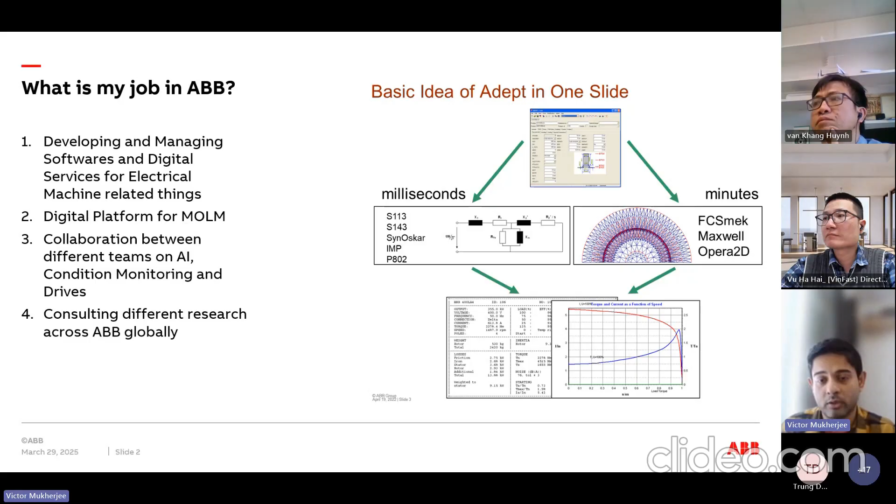So Adept is kind of like an umbrella under which we have our in-house software and also commercial software. It is a bigger umbrella, because if you think about a big company like ABB, we have a very big portfolio. So it has to be very organized how things are done and so on.

One very important idea, whenever you think about any big organization or complex system, when you have multiple researchers, multiple people working in different fields, different divisions, different geographical locations, is how do you collaborate? And I think the modern way of collaboration is basically microservices. For example, let's say person A develops some model and person B wants to use that model. It is very bad if person A needs to zip a file and send it to person B, because then the software is never updated and so on.

But the idea is that everybody can be the owner of their own services and they can host them in the cloud, for example. And anybody who needs them can just call those APIs. I don't know how many of you are familiar with the word API. I think the abbreviation is something like application programming interface, but mainly it's basically a URL link with some sort of token, let's say a JSON file that you give to get and receive information.

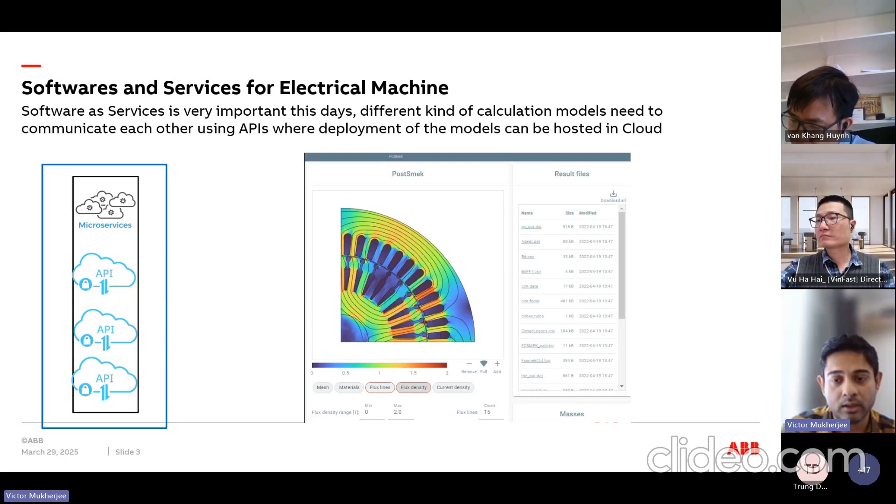For example, this picture that you are seeing is basically in a web page, this kind of flux density plot. So not in any software, but through an HTML page we can do that kind of thing. Everything can happen in the browser. You do not need any desktop GUI software in the modern day. I think there are a few commercial software packages now trying to give you similar experiences, but I would say that we are very advanced in that part: nothing is on the desktop, everything is on the cloud.

Then one of my very first works when I came as a fresh PhD student to ABB was this: how we do system level simulations with drives. I think many of you know that in modern day, whenever we talk about system efficiency, it is not only about individual components. I think we have a VinFast speaker after me, and he can maybe speak more on that.

If you think, for example, about an electric car, every component's efficiency matters and adds up in the end. But how do you model that kind of system level efficiency or system level behavior? For example, when a drive is connected to a machine, a lot of things happen which do not happen when you connect it direct online. For example, a drive has a very ugly voltage waveform. It can create vibrations, it can create noise.

So how do you model them? If you just model it with a sinusoidal supply, then that's very bad. If you model it even with a PWM supply, it is still not very realistic. The ideal situation is that your drive software should directly communicate with your finite element software. It should give you the voltage waveform, and the current that you are solving in your finite element solver should get back to the control mechanism of your drive software.

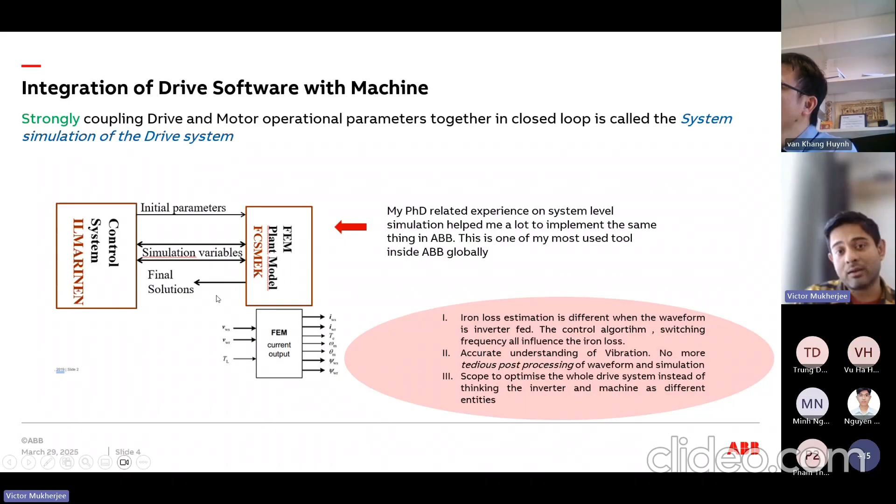But sometimes making this kind of strong software coupling can be very challenging. For some other drives, we do not have that. It was very challenging for us to do that. In those scenarios, we do what we call weak coupling, where we solve the voltage waveform using an analytical model. We store the voltage waveform, and then, like an open loop, we solve the finite element.

And I think in most cases in commercial software, the majority of people are doing it like that. When it is very complex to make a strong coupling, they do this kind of weak coupling: they store the voltage waveform using an analytical model from, for example, MATLAB Simulink, and then give that waveform to more of an open loop model.

This kind of work requires a very strong collaboration and cooperation, because, for example, I am not the person who makes the drive software. I'm not the person who makes the finite element software. But I have to keep asking people and develop that kind of an interface. That requires a lot of collaboration and cooperation. That is very important.

In the academic world, you are quite tied to very easy software, let's say MATLAB, which is very easy to learn and good for researchers. But whenever we work in industry, it is never or very seldom with MATLAB, because it cannot be easily distributed, and it is expensive also. Normally C++ is a great tool when we do a lot of this kind of software development. For any cloud-related or web-related development like APIs and microservices, we always use the Go language, which is a programming language developed by Google.

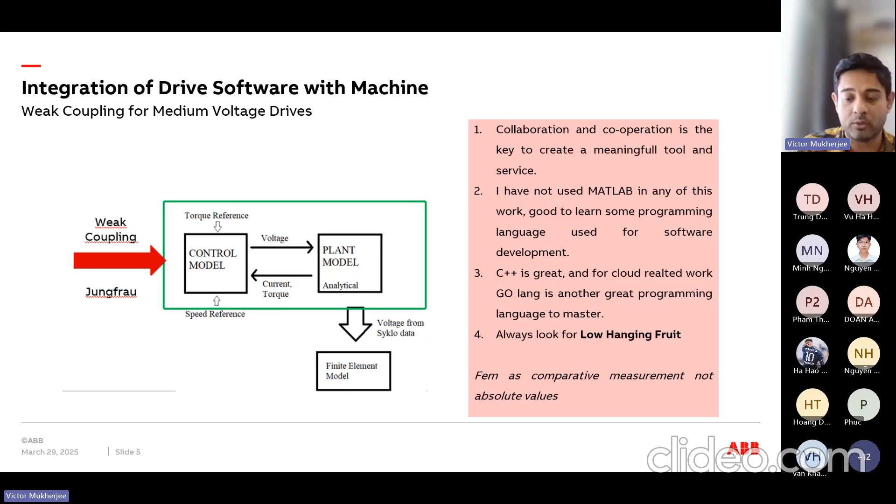And then one very important thing to remember is this: whenever you think about finite element software, it is more of a comparative measurement and not absolute values. So that is another thing to remember, very important. Do not think that, okay, if it is 20 kilowatt, you need to match 20 kilowatt. Nothing like that. It is always how much better the design is in a comparative scenario. That's how you use finite element.

Then, for example, as I said, our main software is Adept, but we also collaborate with third-party software. And in a company like ABB, which is a very big organization, it is impossible to make individually a Maxwell model of our thousands of machines. So we needed some sort of an interface so that we can integrate Ansys Maxwell with Adept, so that people can open our software Adept, which has all the machine information, click one button, and then automatically this whole Maxwell model is developed from our database.

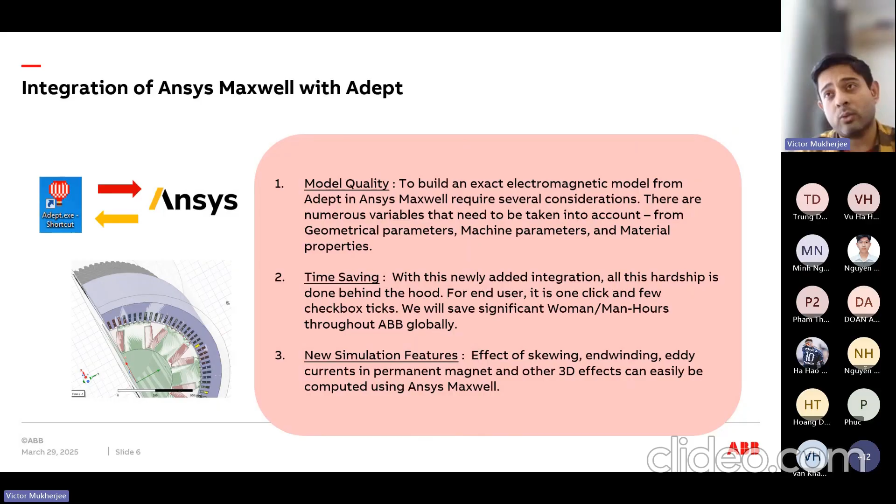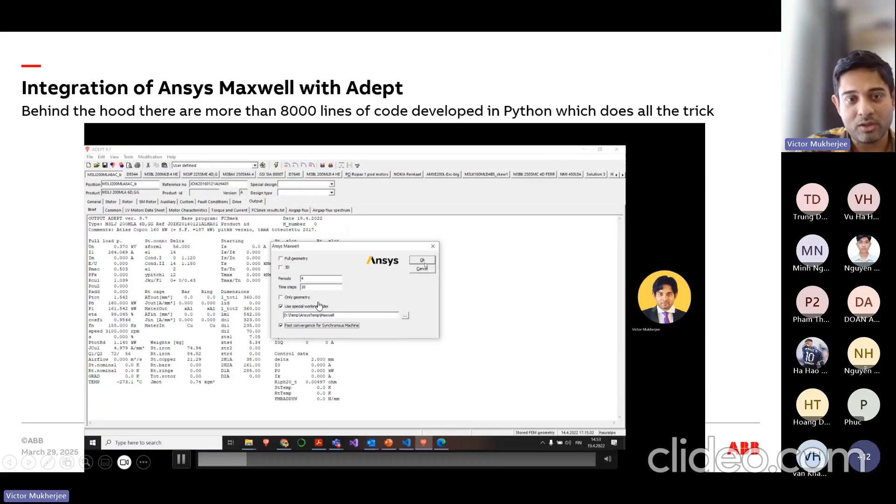So that kind of required a collaboration. So we collaborated with Ansys. We had a 2 or 3 year project with them, and then we developed something. So I can very quickly show you a video maybe. So it's written on the top. Behind the hood, there are more than 8,000 lines of code developed in Python, which does all the trick. But here you just decide what machines you want. You just click some buttons and pretty much that's it.

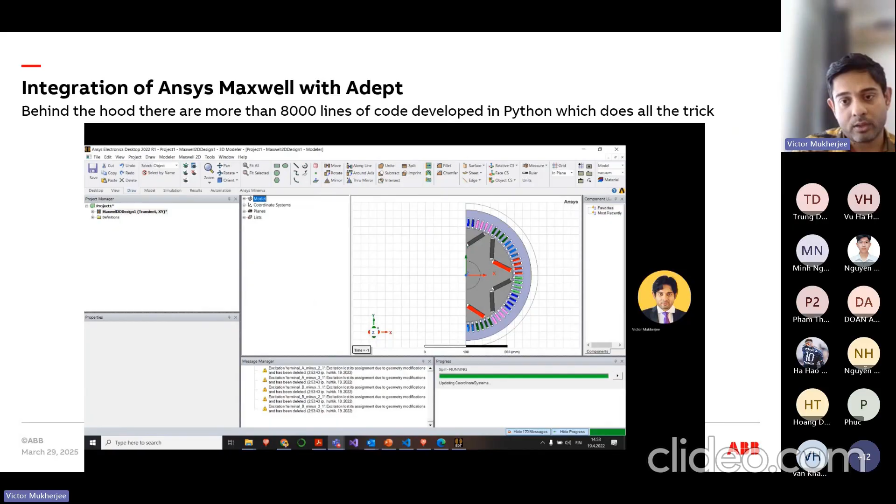So then Maxwell will automatically open and it will collect all the information. This is geometrical information, operational information that you have in your machine. It will collect that information and then it will just develop the model for you. So this kind of integration we have done with Maxwell. And I think we are one of the biggest users of Maxwell software, along with our in-house software. But as you see here, when the user clicks that one button, all the model development is done exactly like how it is done.

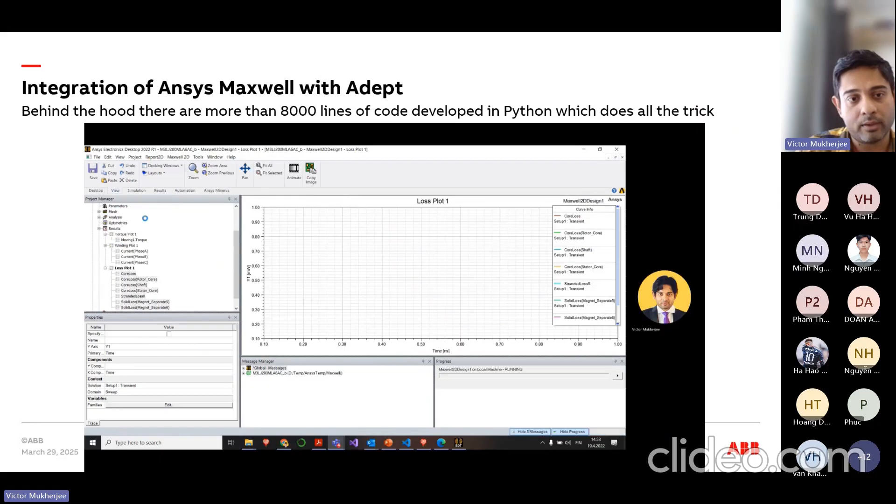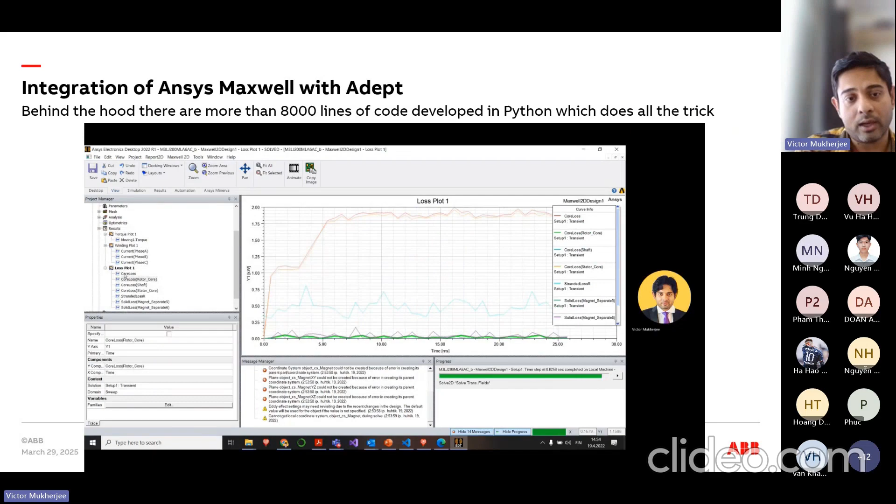And the benefit of this is that a lot of our geometries are very much ABB specific. So it is not possible to have those in Maxwell. They do not have those kinds of templates or anything. But here the idea is that whenever the user clicks it, they get all the necessary information. Let's say torque, current, loss, flux densities, and those kinds of plots, and so on and so forth.

So it is very important to know how we can make things faster, because you can save time for model development. If somebody needs to develop a model like this by themselves, it can take them, let's say, a couple of hours. But now with this kind of interface integration, in 10 seconds they can develop a model. So if you think about ABB, which has so many engineers and so many machines we need to develop, it saves a huge amount of work time. And that is very, very important, how you save time for your development.

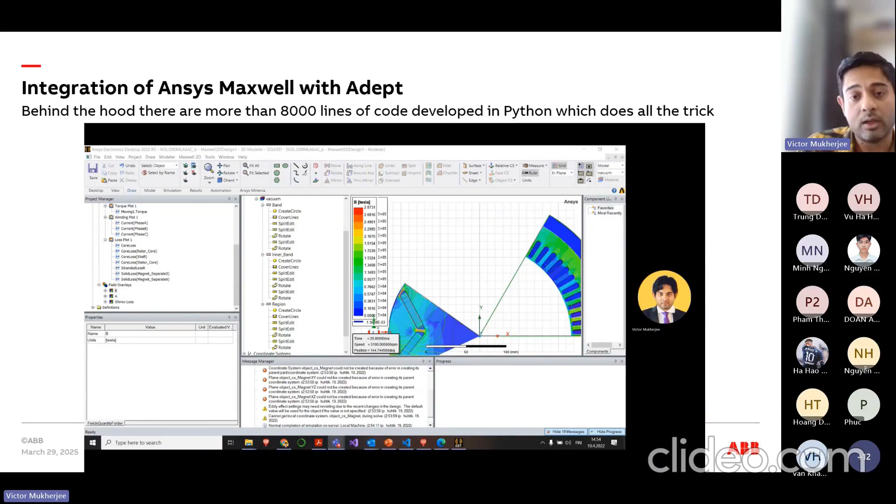Okay, and now with Maxwell, we have done some interesting work: we did a thorough analysis of how 2D versus 3D simulations compare. I know that a lot of people in the academic world have a huge fascination with 3D simulations, and rightly so, because a lot of electrical machine phenomena are 3D. So it is good to know that information in 3D and verify how close our 2D approximations are. So we did a humongous amount of comparison of 2D and 3D simulations.

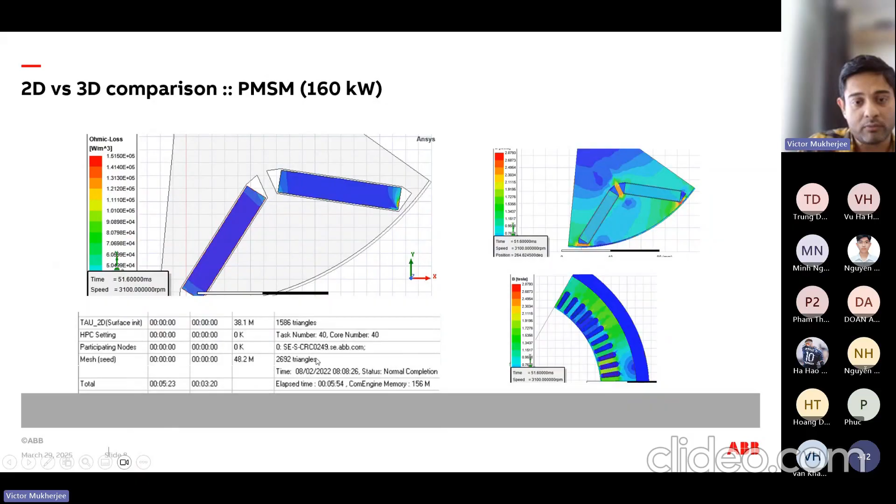We have our own internal servers where we have a huge amount of computational resources, and we did them there. So we made a 2D model and then a 3D model, and our goal was to see how much accuracy we are getting and how much computational time we have to lose. So you can see that with a 2D model, we can simulate something within 5 minutes with this kind of mesh. And then the same thing on our server, using 40 cores, took around 61 hours. So almost 2.5 days.

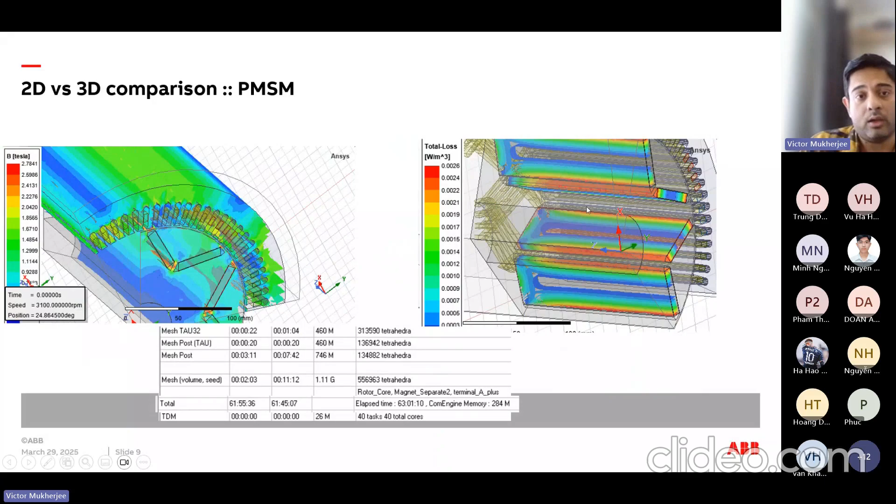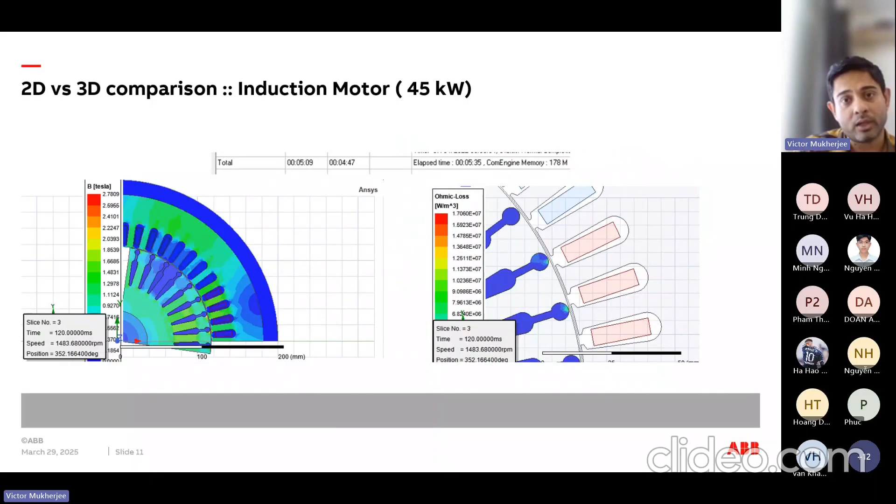And the idea was to check how this torque looks, for example, and then how other features look. Then we did similar analysis with induction machines, for example, the same thing, 2D and 3D. And for us it is very easy to do, as I said, because we have this kind of an interface, like I showed you previously. So we can just click one button that makes the 3D model.

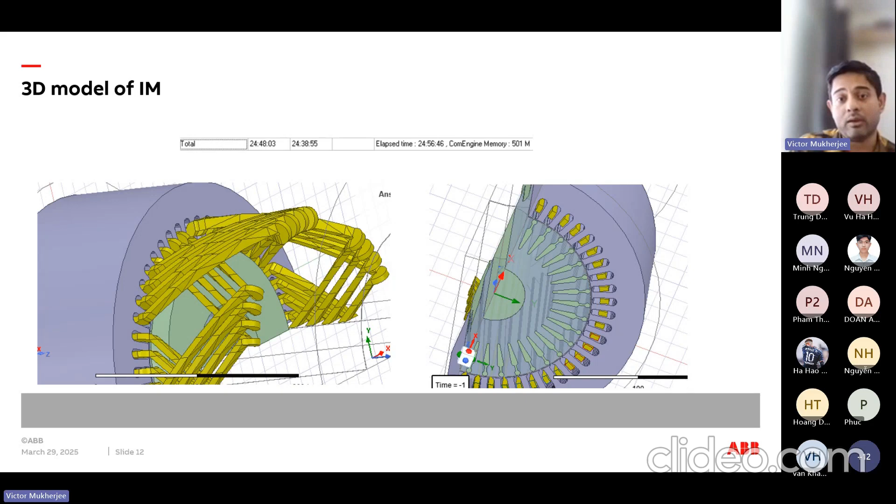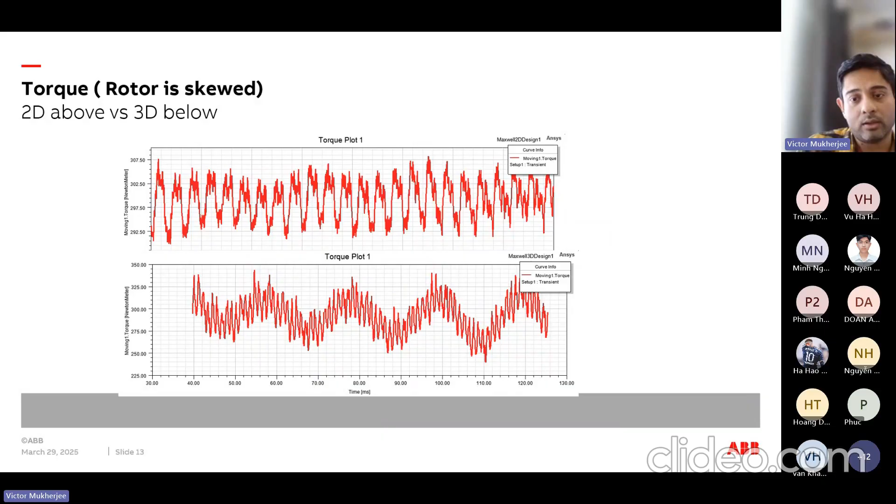So all these things, this model build-up, are happening automatically. And that is the benefit, that we can do this kind of analysis very easily, very fast, because all these model generations are very automatic. And then we compared the 2D and 3D rotor when it is skewed and so on. And you can clearly see that the 3D behavior is, of course, better than the 2D approximations, some torque waveform and so on.

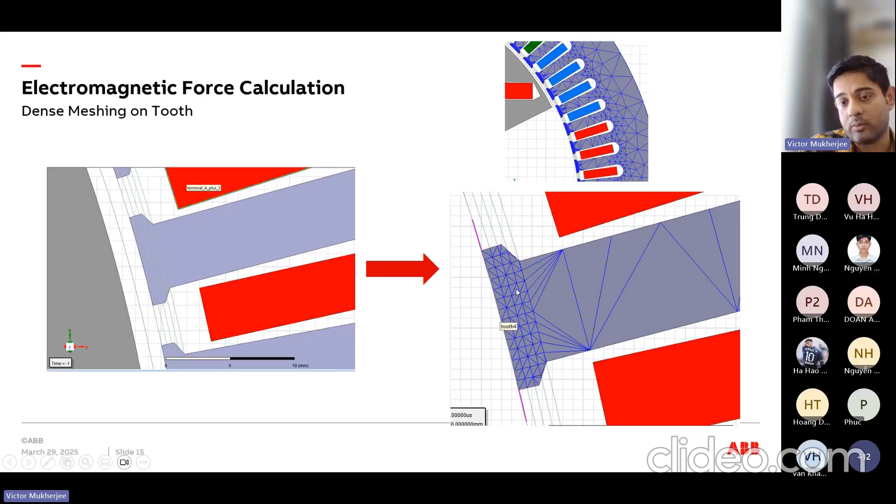Then when it comes to, for example, noise and vibration analysis, you know that it is important to know what the electromagnetic forces are. There are a lot of models, but one of them is that you compute the forces in this kind of region in the tooth and in the air gap. So this meshing and computation has also been automated, so that you just click one button to compute the forces, and then automatically four layers will be created and meshed. This kind of arc will be created and force computations will be done, and everything happens with one click.

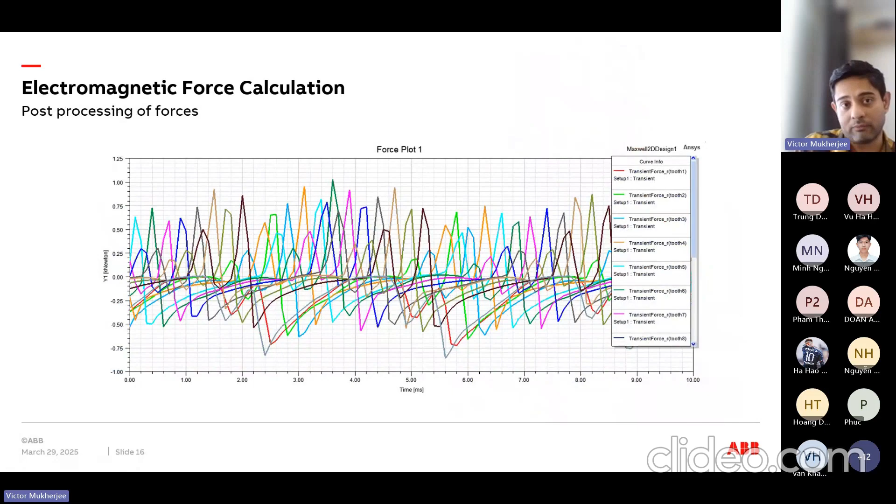So R&D engineers do not need to do those things by themselves every time. So we save a huge amount of time with this kind of software automation. Then, for example, we have magnet segmentation, how you segment the magnet so that you get less losses in the magnet. Probably most of you know that at 50 hertz perhaps it doesn't matter so much, but whenever you go to higher frequencies, eddy current is a concern.

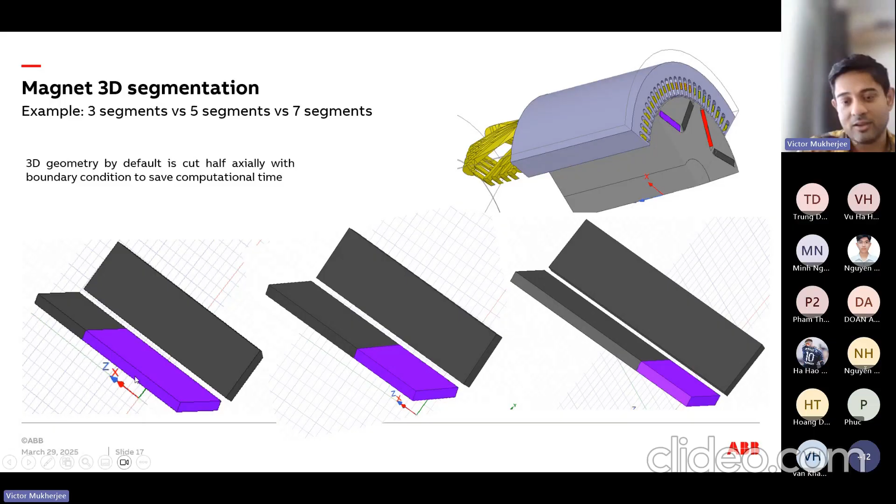So how do you model that kind of problem in 3D, because as you saw previously, it can take a huge amount of time. And in this case, you need a very dense mesh if you want to model the skin effect, isn't it? So how do you model that? This is not my invention. This is coming from our ANSYS Maxwell colleagues who have helped us do this kind of simulation and automate it. So now, with one click again, we can have this geometry created, a dense mesh will be created automatically, and we solve, for example, the skin effect.

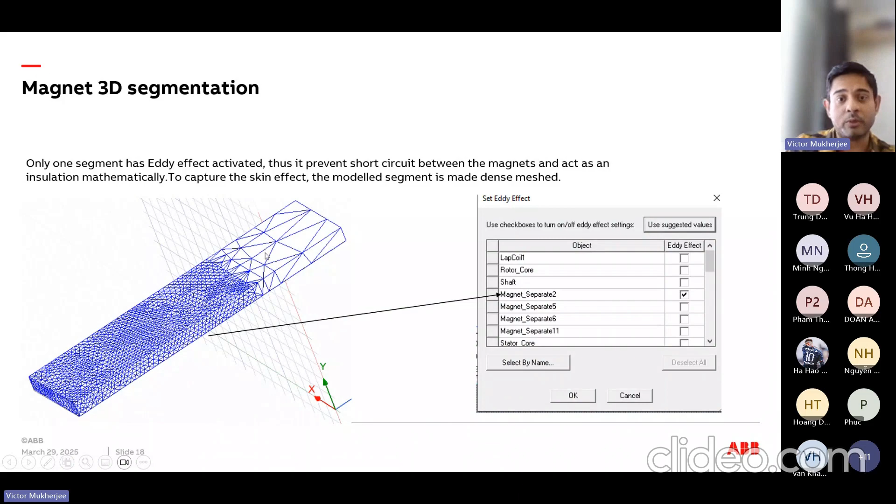And then we apply some boundary conditions here, which basically means that there is some insulation coming from the segmentation, and then we just multiply them. So that's what I have written: only one segment eddy effect activated, because it prevents short circuit between magnets and acts as an insulation mathematically. So if you give a boundary condition, the current is not flowing from one segment to another. So it's a very smart way to model 3D magnet segmentation with Maxwell. And then you can see some results here, how the losses are.

Okay, in the beginning I said that I am also very much collaborating with industrial AI. For the last 2 or 3 years, I have been quite active with a lot of industrial AI related projects, and that's how I also know Trung, I think. So we collaborate with different research institutions in Finland and with universities, and I think it's a win-win situation, because together we can create very nice value out of the work. This is one collaboration that we did with a Finnish research institute called VTT.

And the goal was this: when you think about induction machines, whenever one is connected to the grid, there is a huge transient, right? That's the whole starting behavior of an induction machine. It is quite a transient behavior. So we wanted to model that with an artificial neural network. And then we thought this can be used as a digital twin, for example, of induction machine behavior.

So here the complexity lies in how you can model a transient behavior in a time series. So how this is beneficial is that you need to take the input of the change of your rotor speed every 10 seconds. That's how we take it as back propagation, and then we model this using this kind of artificial neural network.

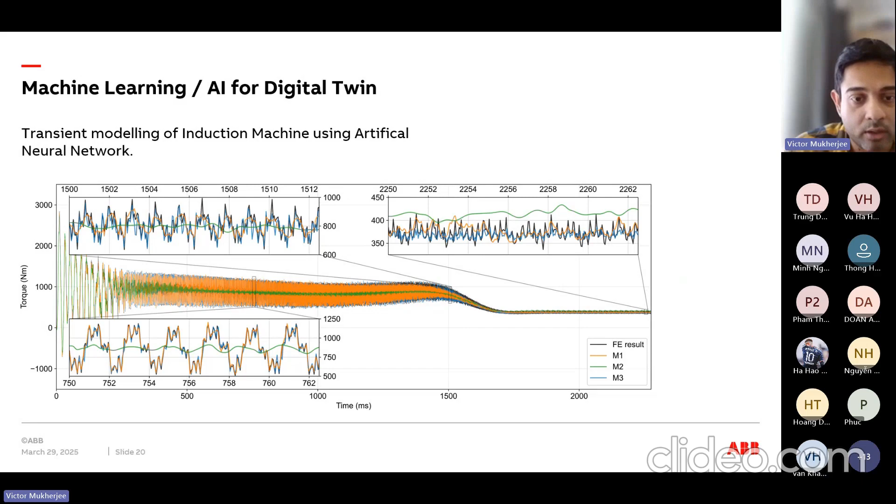Then also one of the important things that always comes to our desk is how you model the losses of an electrical machine using machine learning. Because if you think about electrical machines, there are, let's say, 3 key components that influence the losses. One is the speed of your machine, the torque of the machine, and the switching frequency of the drive at which you are operating your machine. So there are 3 components that mostly influence the losses.

And our goal was: can we create a machine learning, or let's say AI-based, digital twin of the electrical machine that can take those 3 inputs and quickly predict the losses accurately? And then we benchmarked different machine learning models. We used neural networks, light gradient boosting methods, and lookup table based methods. What we have observed is that the very simple lookup table based method is not good. Whenever you have more and more dimensions to interpolate, that's not good.

Then going to a too complex neural network is also not super good for us. But what we found is that these light gradient boosting regression models are very good, giving very good results. So this kind of quick model that can predict the losses can be very beneficial when in real time you need to model the temperature distribution of the machines and so on. And this is all public information. Papers have been written, so if you search in IEEE, you can find all this information in detail.

For example, you will hear this kind of news quite often, that AI has defeated a chess player, or AI has defeated another chess player in some games. Reinforcement learning is one branch of unsupervised machine learning. Sorry, let me go back. When we talk about machine learning in the loss modeling scenario, it is supervised learning, because you have a clear understanding of the operating points and the losses, all the data is there, and you are just modeling.

But reinforcement learning is unsupervised learning. The fundamental difference is that you do not tell the agent what the outputs are. You tell the agent what the behavior of the system is. For example, you play a chess game with the AI many times. If the AI makes a good decision, you give it a reward. If the AI makes a bad move towards the goal, you give it a penalty. So you basically let the AI play the electrical machine game millions of times and see if it can reach the final goal or not.

If you have, let's say, a base machine, let's say you took a machine from the vault, which is, let's say, 50 kilowatt, and then you give a task to the AI: hey, I have a basic design of a 50 kilowatt machine, now make me a 60 kilowatt machine for these conditions. And you make it play this kind of game more and more. And when it plays these games a million times, it knows exactly the policy. Please remember this word, policy.

It remembers the policy of the game: okay, if I play this way, I get a reward because I can achieve my target. If I play this way, I do not get a reward, I get a penalty, and I lose the game. So this is the idea of reinforcement learning, which we investigated with Aalto University, and we have now submitted a paper also. The idea is how we design a machine using reinforcement learning. For example, if this is the starting point of a machine, and this is the goal, how the algorithm can automatically make these decisions to get to this kind of final design.

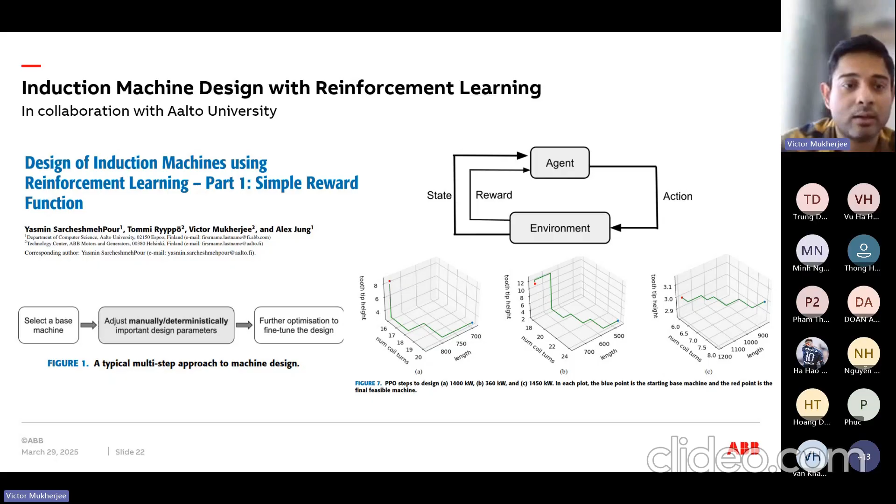Then we also work quite actively on bearing health analysis using machine learning. This is another collaboration that we do with Aalto University. As you know, around 50% of industrial machine faults come from bearing faults. And there can be many ways a bearing develops a fault. If the outer ring is destroyed, there can be one type of fault. If the inner ring is destroyed, there can be another kind of fault. And there are so many other ways the fault can develop.

So we took this kind of modeling, where we have done a huge amount of simulations, and then we wanted to see how the bearing fault can be modeled with machine learning. We have an electromechanical model for the bearing, which is basically a lumped parameter based bearing model. And when we collect the data in real life, we use this kind of smart sensor. You can Google ABB smart sensor. It's a device that can collect different kinds of data from the machine, for example flux, voltage, vibrations, temperature, and all those signals. And once it collects all this data, it can send it to the cloud.

And then the goal is that we can analyze this data with frequency and time domain analysis. Then we have our model that does AI based fault diagnosis based on this data crunching. The goal is to have a model to predict whether the machine is having some bearing problem or not. If there is some sort of bearing problem, we can see the signals in our cloud dashboard. Then we can already tell our service engineer, hey, maybe you need to visit this factory and tell the manager that the machine needs some inspections.

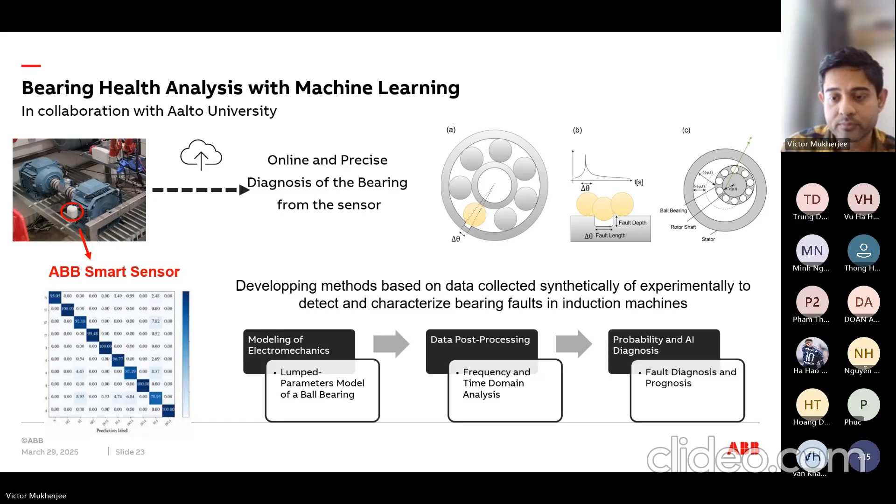Then another work that we are doing right now is anomaly detection of induction machines. Something very similar, but here the approach is a little bit different in that we wanted to use an autoencoder-based system. That basically means that we wanted to know what is the healthy data and what is the faulty data, and then we just wanted to segregate the healthy and the faulty data with these autoencoders.

But as you know, in any industrial AI work, the biggest challenge is to get the data. We cannot have faulty machine data in a measurement. So how do we solve this problem? We solve it by simulating those machines with the faulty conditions. But hey, there is another problem there. Your simulation world and your measurement world, they're different. So your simulated data will look very different than your measured data, right? So how do you solve this problem? That is exactly where data augmentation comes in.

When you know your measurement data and your simulated data, you can understand what the differences of the simulated data with the measured data are. Then you can augment the noises and the uncertainties that come in the measured data inside your simulated data, so that your simulated data becomes closer to reality. That is what we call data augmentation: you calculate the data from simulations and measurements, and then use some sort of model that assimilates the data and makes the simulated data look very similar to the measurement data.

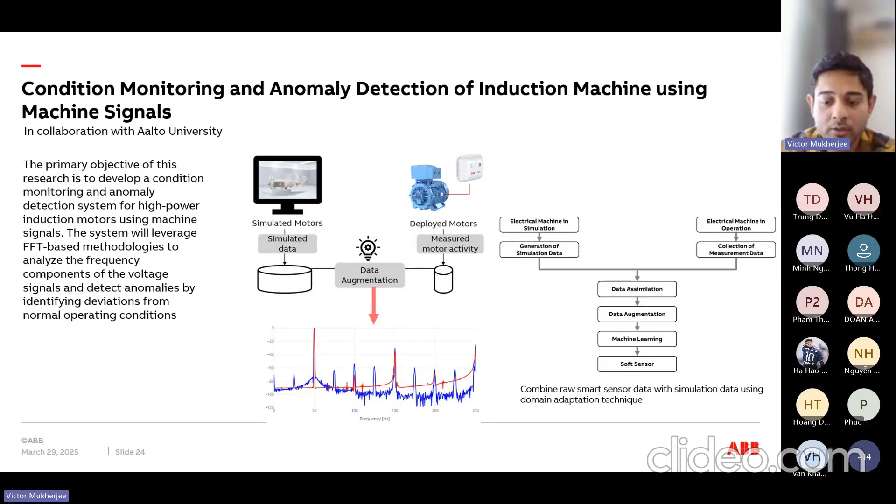I think I went a little bit overboard today, but anyhow, the conclusion I will give you as a thought for all the young researchers today: in university, research is the priority, but in industry, development is the priority. In university, we are kind of like a lone warrior, fighting our own battle by ourselves. But in industry, collaboration and communication are the key to get your work done, because you will be working with multiple stakeholders, and how you communicate, in which language, and how you get the collaborations is extremely important.

Another thing is that in the academic world, we normally reinvent the wheel a lot of times. But in industry, your goal is not to reinvent the wheel. You have to use the work that has been done by your colleagues. You have to ask them, collaborate with them, and your goal is to bring value out of the work. That's why customer success depends not only on innovations, but also on implementations.